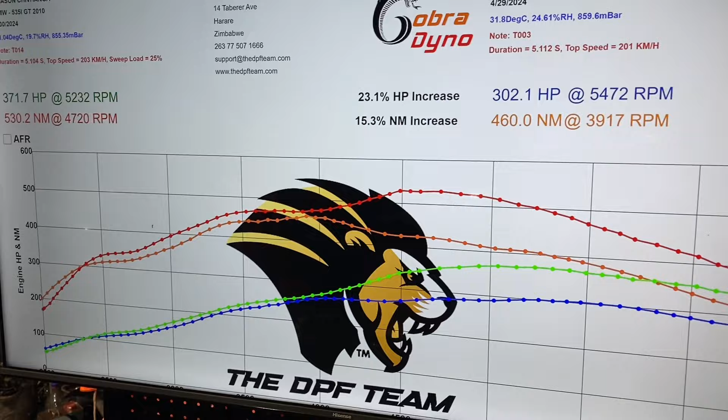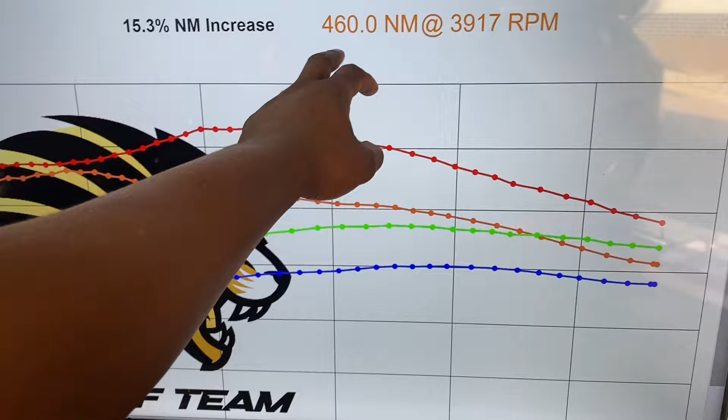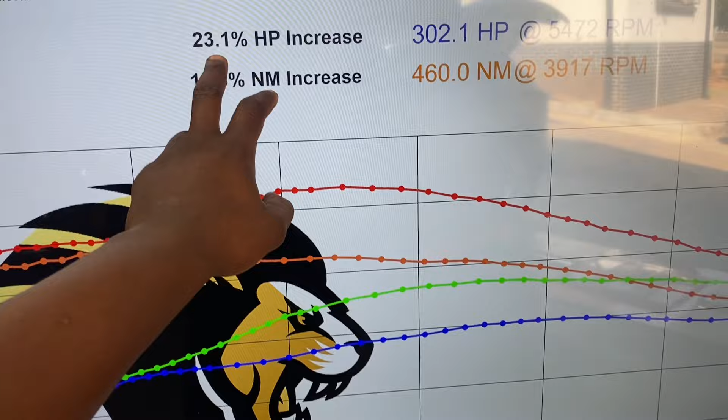So I just want to make a quick analysis. The car was making 302 horsepower when it came here, at 460 Newton meters of torque. And with our tune, it was able to get to 371 horsepower at 530 Newton meters, representing a 23% increase in power. You can see it's got a healthy increase.

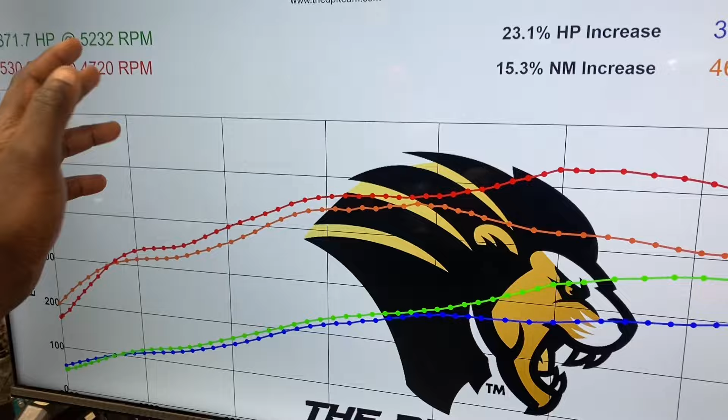We just saw that there's so much opportunity right at the top end here to actually make more power. So you can see right at the top here, that's where it really makes a lot of its power. Now, obviously the customer of this car was more concerned with making noise. That's all he wanted, pops and bangs, more than a lot more power.

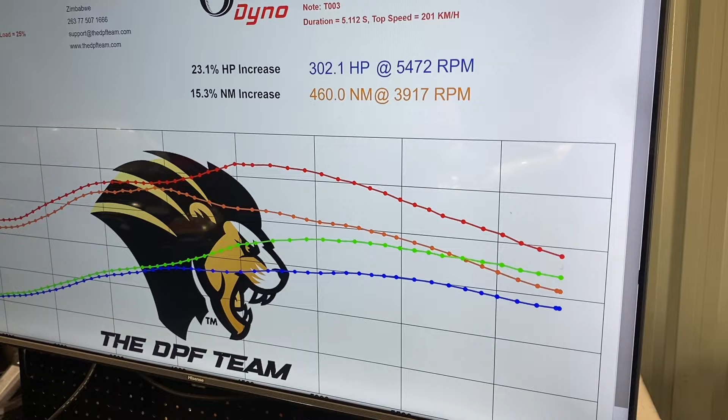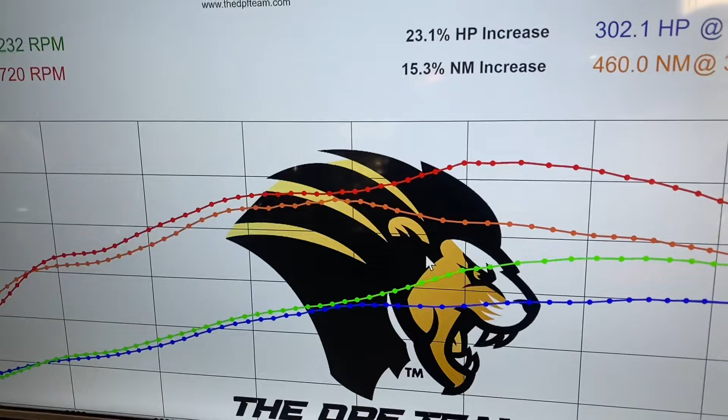324 was probably the lowest, as we increased the sound intensity to as loud as we can make it. We then left it at a point that we felt was comfortable. So then it ended up making 360 and we just left it there.

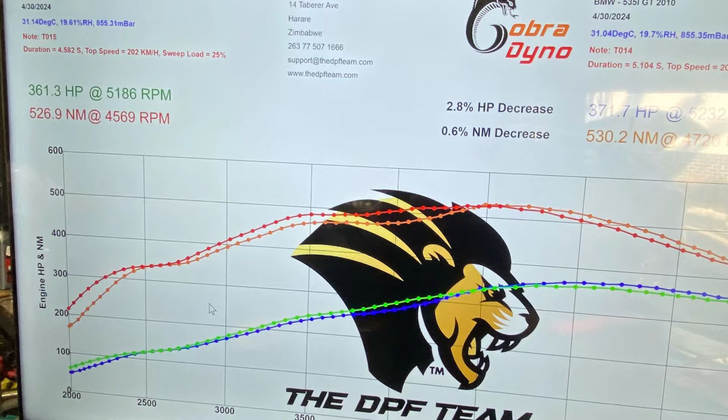But the whole point, what I'm just trying to bring out, is that pops and bangs have got an effect of actually reducing the power, because pretty much you're generating a lot of heat in the exhaust. As you know, the head of the car is made of aluminium, and because it's made of aluminium, the head is going to act as a heat sink when the exhaust really gets hot.

So pretty much the ECU by itself is going to try to reduce the power so as to avoid nasty things like overheating and also detonation. Those are the risks that you're probably going to run into with a higher temperature.

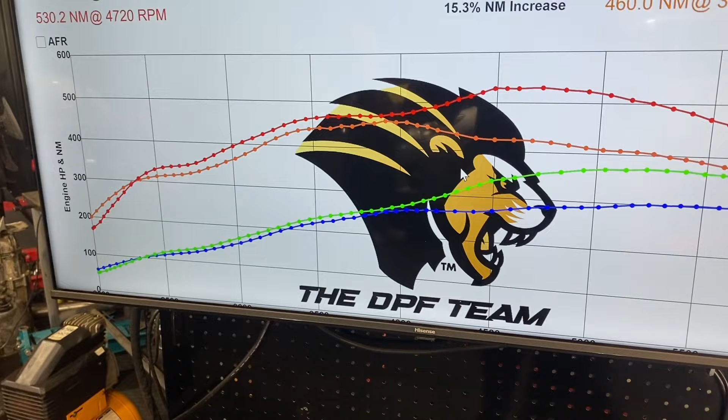So for somebody who's really serious about, let's say, racing, I would say pops and bangs are not your friend. Pops and bangs is something that you may want to stay away from. But if you are using this car just for giggles and fun, yes, that's fine. But just know that you're leaving a lot of power on the table.

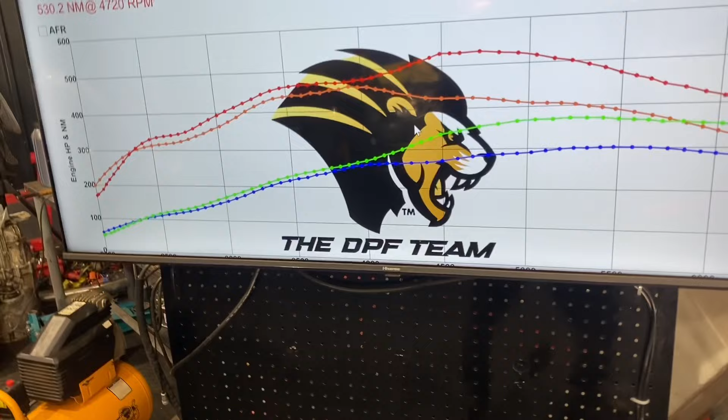I know somebody in the comment section is going to say, oh, so why didn't you turn off all those safeguards? Because pretty much what makes the car reduce the power is the safeguards. Why don't you turn them off? We can't do that per se, because when we really do that, that's when we start to get into the danger zone, the territory of actually damaging the car.

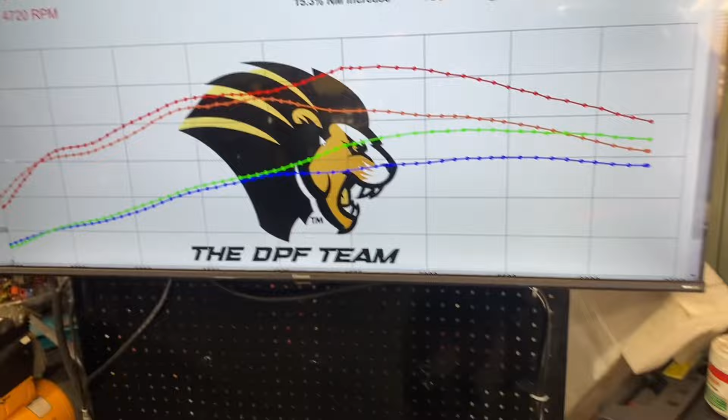So this is something I want you guys to know about, and I hope this gives somebody a bit of better knowledge, especially if they want to get their car tuned as well.